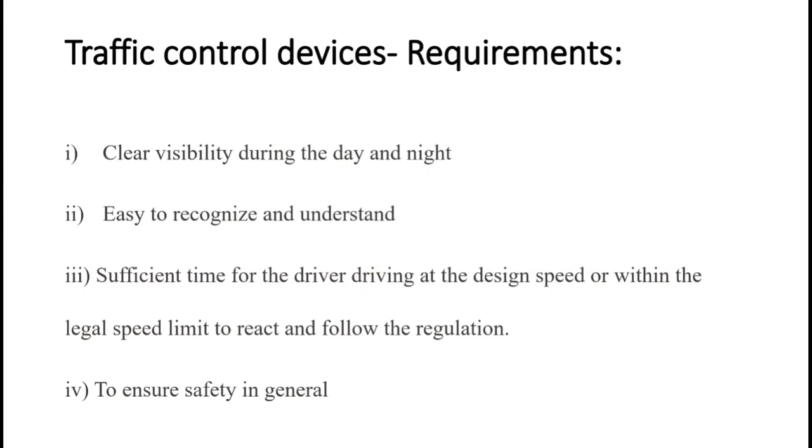The controls on drivers include eligibility for driving motor vehicles, issue of driving license, and other regulations on drivers during the act of driving. That is what is meant by driver controls.

As per the Motor Vehicle Act, we have a minimum age for getting a driving license. For a non-geared two-wheeler, the minimum age is 16 years, and for a geared two-wheeler, the minimum age is 18 years. Similarly, for a four-wheeler also it is 18 years minimum age. These are the controls imposed as per the Motor Vehicle Act on the driver.

We also know that in order to drive a motor vehicle, you should have a valid driving license. If you drive without a valid driving license, it is an offense.

Similarly, before the issue of a driving license for a specified category of vehicle, one has to undergo a series of specified tests, and the driver is expected to demonstrate his ability to drive the vehicle safely. We have to go to the test spot and prove that we are conversant with the motor vehicle rules and regulations.

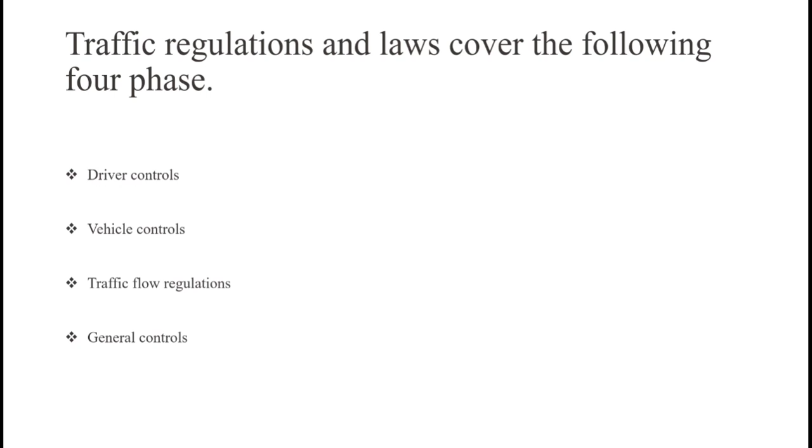So now we will be discussing on the methods of improving the vehicular flow. The first one is the one-way streets. In a congested street, one of the methods to reduce severe vehicle accidents and to ensure smooth flow of traffic

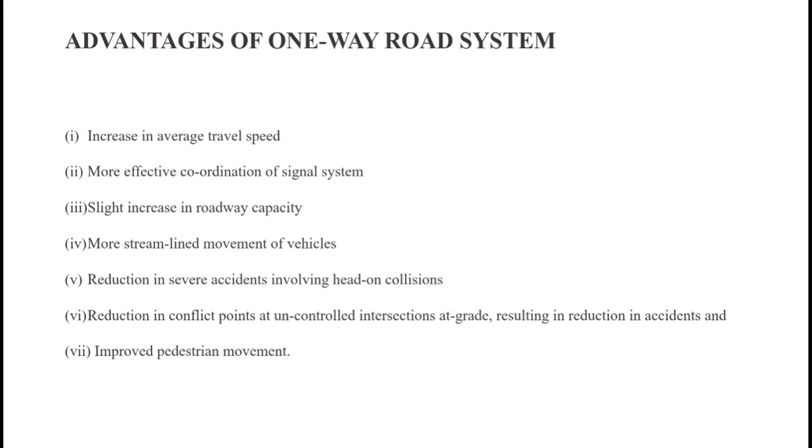Reduction in conflict points at uncontrolled intersections at grade, thereby reduction in the number of accidents. And also improved pedestrian movement is possible, whereas there are certain disadvantages, that is, increase in the travel distance for the majority of vehicles.

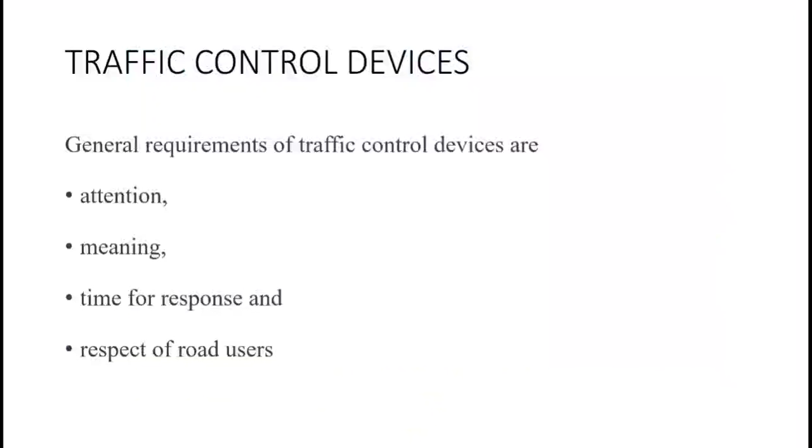So the location should be such that there should be sufficient time for the driver to respond and take appropriate action. Okay, so these are the different requirements for the traffic control devices. Now we will see in detail each of the regulatory signs.

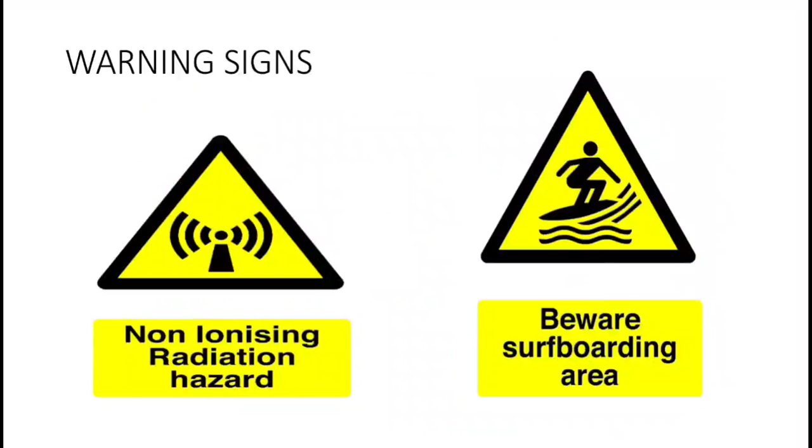So like we have sharp curve, slippery road, cycle crossing, pedestrian crossing, men at work. Unguarded railway crossing is there, falling rock, beware surfboarding area, non-ionizing radiation hazard is there. So for all these hazards, we will get warning from these signs.

Normally the color depends on the classification of the road. For national highways and state highways, the informatory signs shall be of green background with the borders and word messages in white color. For all other categories of roads such as major district road, other district road, village road etc., these signs shall have a white background with borders and word messages in black color.

So that is the difference between the color of the informatory sign in national highway and state highway, and in major district road, other district road, and village road. So if it is green, you can infer that it is NH or SH, state highway, and if it is in black, that it is MDR, major district road, other district road, or village road.

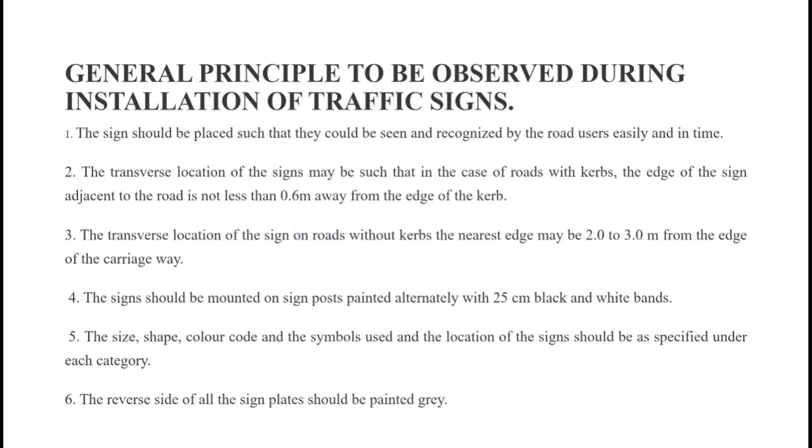The signs should be mounted on signposts which are painted alternately with 25 centimeter black and white bands. The size, shape, color code, symbols used and the location of the signs should be as specified under each category. The reverse side of the sign plate should be painted in grey color. So these are the different principles to be followed while installing the traffic signs, and in the next video we'll be discussing the traffic signals in detail.